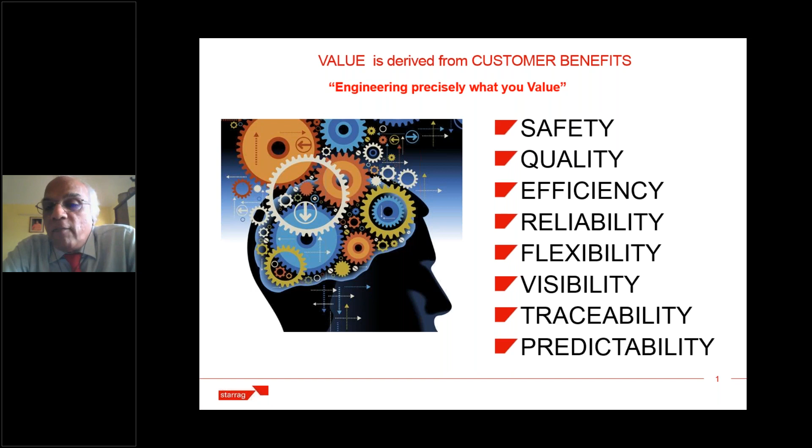Mini mass production, M-I-N-I, mini mass production. He is talking about customized production where variety is to be handled with velocity and volume. So flexibility becomes extremely important. And if those are the values of the customer, I would like to consider a machine tool design and the process of using the machine. Consider it as a 3-in-1 package.

I call it the overall equipment effectiveness, or the 3-in-1 package. Why do I call it a 3-in-1 package? Because the three are interrelated to each other. Many times we talk about productivity, quality, and availability, namely the uptime of the machine, as three independent parameters. Unfortunately, or fortunately, it is not so. They are three interrelated parameters. I'm sorry, there is some typing mistake there.

Machine availability stands for downtime measurement, reliability of the machine tool, and service response. Even if there's some reliability issue, how quickly we can fix the problem will improve the availability. Machine productivity depends on cycle time, performance — which means productivity — and performance also means including quality, but this is affected by parameters like torque, power, etc. Machine quality depends on accuracy, consistency, repeatability, process capability, and so on and so forth.

But when this overall equipment effectiveness leads to reliability, accuracy, and long-term precision, etc., you will see: if all of them are 90%, the product gives you only 73%. If all of them are 97%, the product gives you 91%. So our aim in manufacturing, design, and value engineering is to maximize the OEE. That's what I want to summarize: our entire discussion is woven around not just features, not just some fashionable parameters, but overall equipment effectiveness.

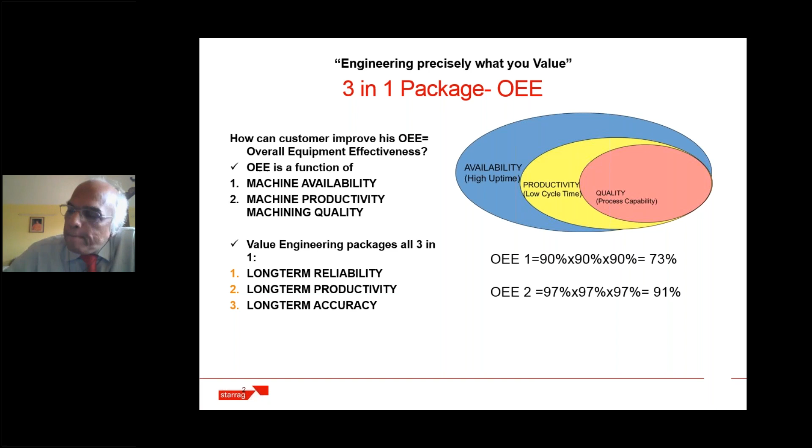I'll move a little faster now because of the time constraint given by VDMA. We have to move fast, though the same material could take 2 hours. Now, let's talk about high productivity and cycle time reduction.

The Japanese were focusing on high-speed machining centers because most components in the Japanese automobile industry are made of non-ferrous materials like aluminum. Whereas in the German concept, from the 1960s onwards, they were looking at high-performance machining centers, working with cast iron, steel, and tougher materials like super alloys.

That's the history of machine tool design. We have to look at cutting time reduction, non-cutting time reduction, pallet change time reduction, and so on. So when you talk about value engineering, the design concept has to find the optimum between high-speed machining centers and high-performance machining centers.

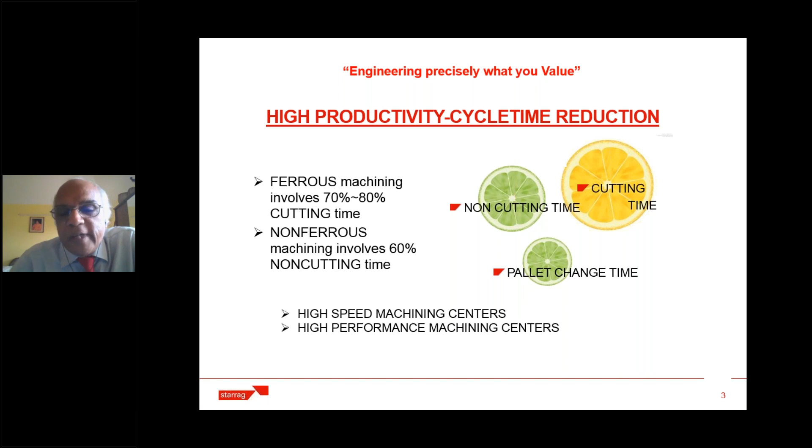Now moving on, we must be wondering what is the value engineering definition. By now you're familiar that we have to look at value not standalone, but along with cost. Some quiz questions alluded to the ratio between value and cost. For a small incremental extra cost, if you get a large increase in value of the product, the machine tool in this case, that is a very good achievement of value engineering.

Conversely, at the same cost I can increase the value, or do it at lower cost but give the defined benefits to the customer. Another way of looking at it is the optimization or trade-off between cost and function. Functionality relates to quality, productivity, or downtime of the machine, as we already talked about. And above all, frugal innovation.

Mr. Parasuram talked about the iPad concept - lower cost compared to a laptop, but more benefits to the customer since we can carry it wherever we want. Last but not least is modular value addition. Value engineering and value addition are two sides of the same coin, which I will explain through examples.

I will also talk about cost per part machined, total life cost concept, and total system concept. So there are three things: cost per part, total life cost, and system cost. Let's go through some examples to understand this better.

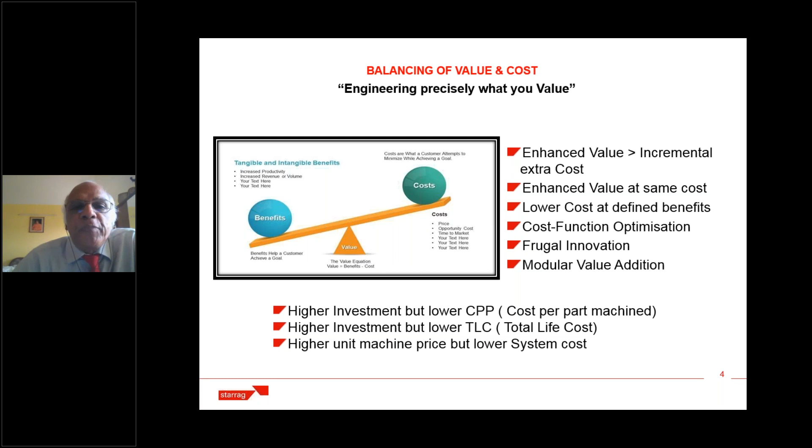We'll come to another very important point - the value chain. When we talk about a value chain, the final customer may be a tractor manufacturer, but he is manufacturing a gearbox. The gearbox goes into the tractor, but to manufacture the gearbox you need a machining center.

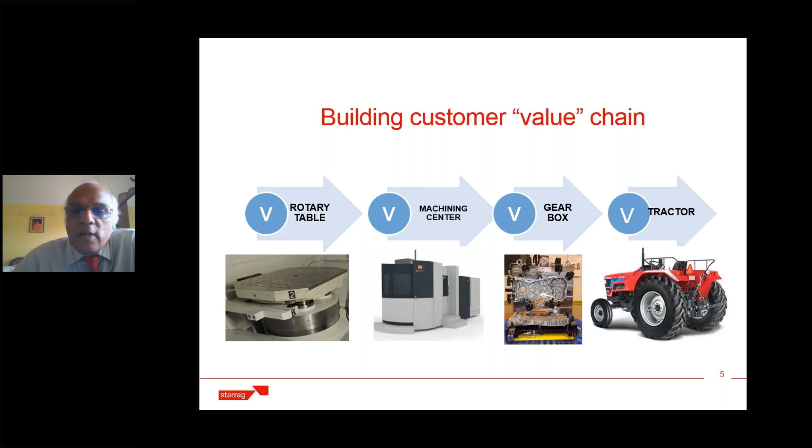Inside the machining center there is a subsystem called the rotary table, which is part of the machining center, leading to the machining of the gearbox with the help of fixtures and tools, and finally to the assembly of the tractor. In this value chain, what's very important is that at every stage, are we increasing the value at the same cost, or at marginally incremental cost, is the value to the customer increasing?

One example we did was with a very nice customer in Chennai with a very small compact machine. They were delighted because the same competition process was giving 2 machines. Even though the capacity was requiring only 1.6 machines, you cannot supply 1.6 machines, so all my competitors were offering 2 machines.

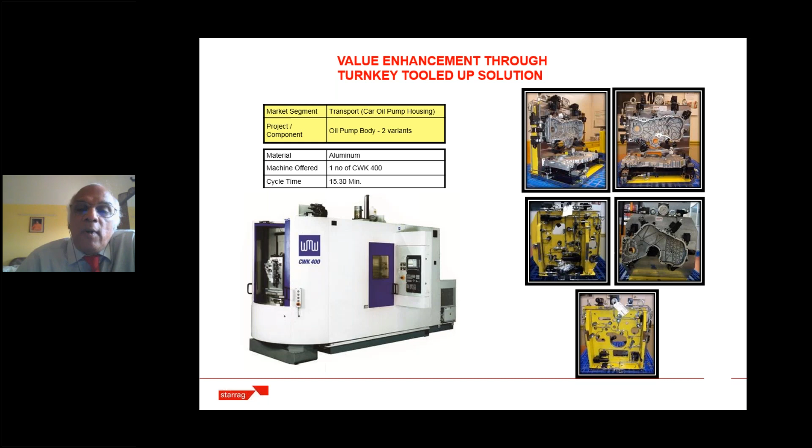Our people were so ingenious in the fixture design that all the setup changes could be managed with just 1 machine. You can see the fixture concept - the fixtures are placed on both sides, and the hydraulics are so well designed that the productivity and capacity could be achieved with just 1 machine. We call it the tooled-up solution, which most of you in the audience are familiar with.

The reason I'm giving this example, ladies and gentlemen, is that value is not just the machine tool, but together with clamping fixtures, cutting tools, and sometimes flexible automation or robotic automation, we try to satisfy and delight the customer. So there is value enhancement through a turnkey tooled-up solution.

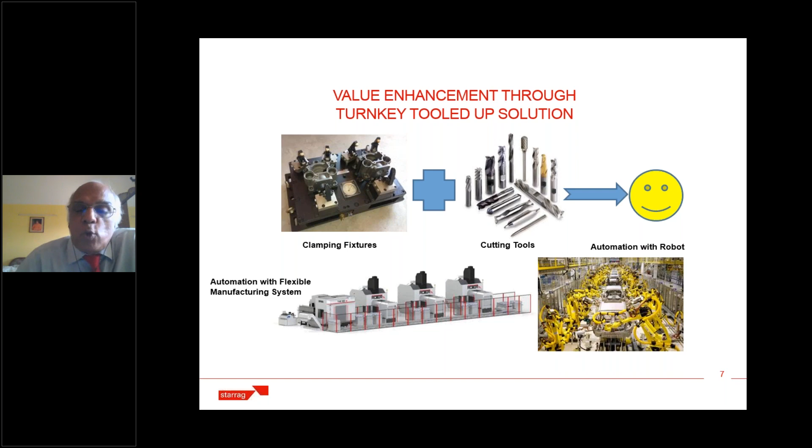There's a real-life case study I did in Chandigarh when I was managing director at Starrag, and I continue to be on the board. All competitors were giving 8 machines for the same capacity, and we achieved the same thing with 7 machines, proven with a turnkey tooled-up solution, which gives a very low cost per part.

The unit cost per machine may be high, but the cost per part, calculated as running cost divided by output per hour, and the running cost in this case is a summation of tool cost, fixture cost, consumable cost, maintenance cost, energy cost, downtime cost, and so on.

All this cost totaled up divided by output per hour makes it cost per part. Ladies and gentlemen, not only did the total number of machines come down, but the cost per part was the lowest in the industry, and without any discussion, the order was obtained and proven in practice over 3 to 5 years, still going on very strong.

Now, another example is the total life cost. Earlier we talked about total cost per part. Now, when you talk about investment, many people look at the value of the machine as very high to invest in the beginning. Even MSMEs say it's not affordable.

Here is an example where a machine tool industry purchased my machines, and because we could give proof, also proven in actual practice with references and actual case studies thereafter, that the total life cost over a period of 10 years, not the initial 1 or 2 years, including machine investment cost, turnkey cost, running cost, maintenance cost - underline, very important, maintenance cost - annual depreciation cost, when all these are added up and taken care of in the form of volume and variety, customized production, the total life cost was the lowest in this case. So every benefit can be measured in terms of cost.

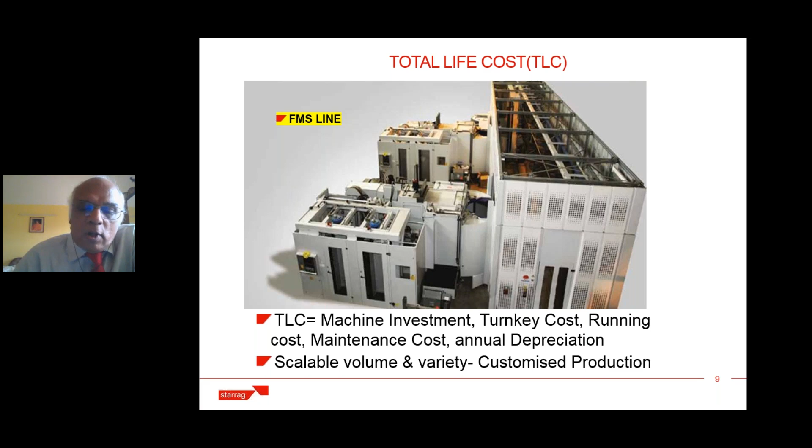Now, let me move on quickly to some examples of unit machine design. So far, whatever you saw was about how to give a tooled-up solution. Customer is never looking for a machine or a product. The customer is always looking for a solution, because he is in the business of manufacturing, let's say, a cylinder block or a cylinder head or a gearbox or whatever. It could be a valve industry, it could be aircraft parts, any part.

But he is looking for a solution to do with his component faster, better, and cheaper, with the best quality, delivery, and cost, and with flexible production of multiple varieties of parts. So he is not interested in the basic machine. He is looking at the solution.

However, I would like to now take you through, even in the basic machine, the way we can do value engineering and value addition. Now, when we do that, always start with the customer. My advice to all my friends here is, instead of looking at the product or the machine or the technology, even Industry 4.0, you should ignore it and look at whether it is useful for the customer.

Here is an example of small ferrous and non-ferrous parts for passenger cars, light commercial vehicles, tractors, trucks, and so on, multiple shapes and sizes. Metallurgy could range from non-ferrous to ferrous, sometimes super alloys. Accuracy levels could be anywhere from 1 micron to 7 micron positioning accuracy, with geometric accuracies varying widely. Volumes could be anywhere from 10,000 per annum to 1 million per annum. Variety of parts could be just a couple of types or as many as 150 types.

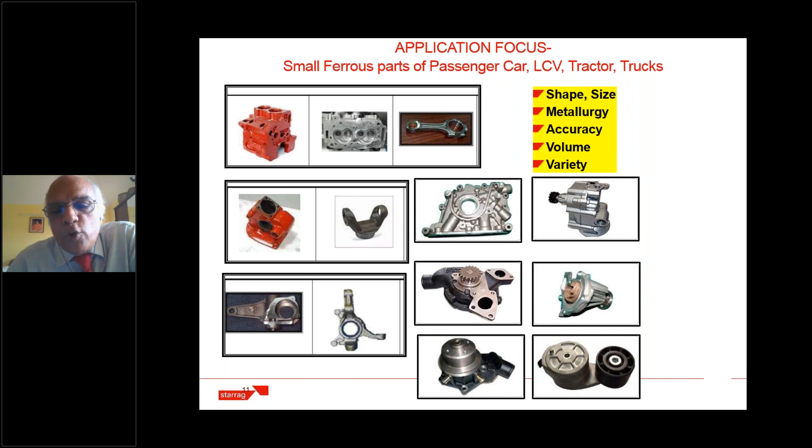Now moving on to examples of what I'm talking about. When we design the machine at the starting stage, we have to do external benchmarking, and also internal benchmarking. What is external benchmarking? When designing a machine, we look at the best in the world - Japanese, German, Korean and other manufacturers - and look at what are the best things they are doing in their own way, and what we can learn from that.

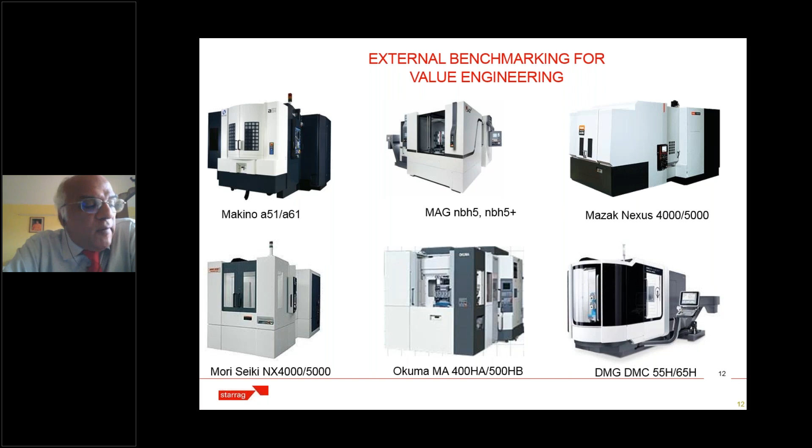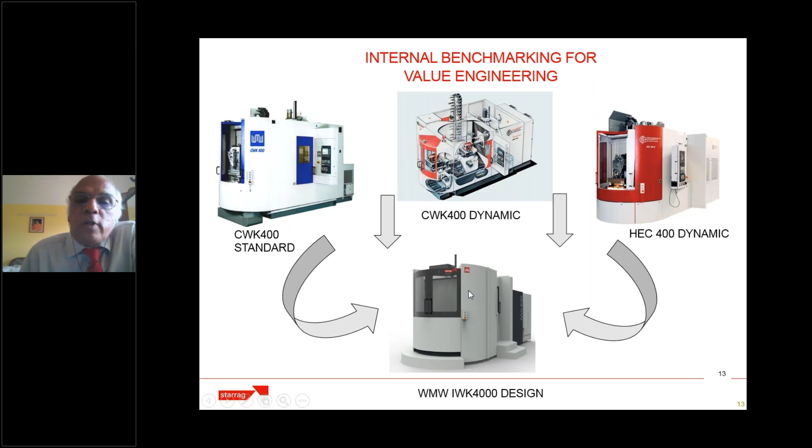Emulating the good ideas from anywhere in the world is very, very important without diluting the brand image. And we come to benchmarking our own product - we took the 30-year-old design product, a 20-year-old design product, a 10-year-old design product, and we came up with a design which is a composite value-engineered product. And what are the things we did?

One example is the conveyor evacuation system. The original designs had a very expensive central trough conveyor. Then we came to a dual screw conveyor, which is cheaper than this. And then we came to only bed flush for chip evacuation.

In this case, not only is the cost reduced, but the value is improved through reliability, because reliability depends on the number of moving parts. And as you can see, the number of moving parts comes down as we move from one design to another.

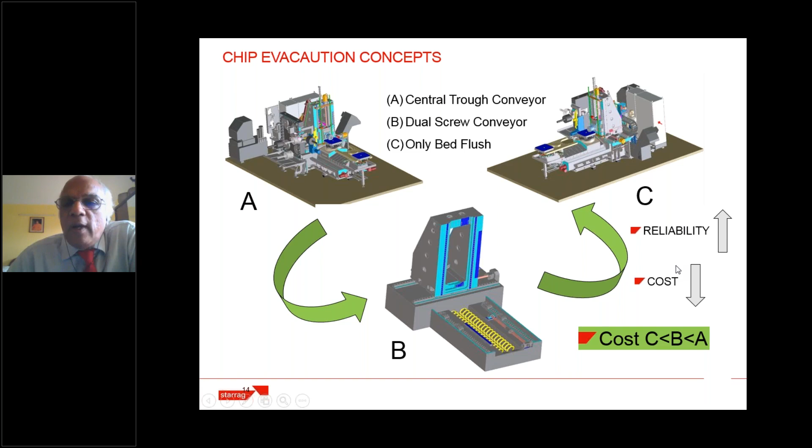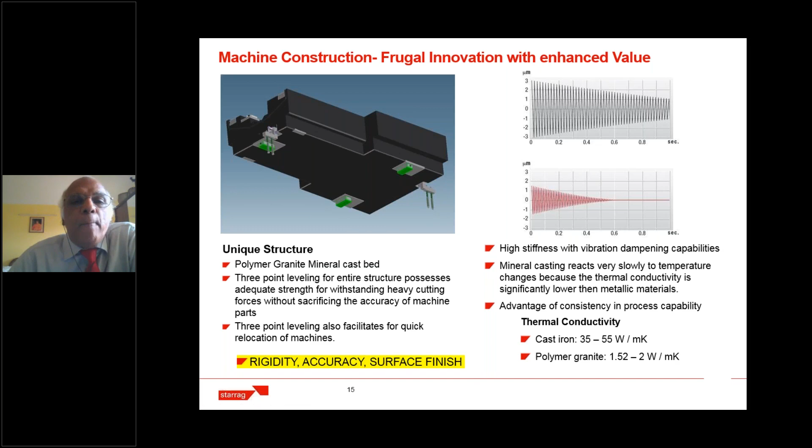I don't want to take many examples. This is an example of a polymer granite bed where rigidity, accuracy, and surface finish are all improved at the same time at a lower cost compared to a typical cast iron bed. Another example is a multi-purpose power pack for hydraulics, and another composite system for lubrication.

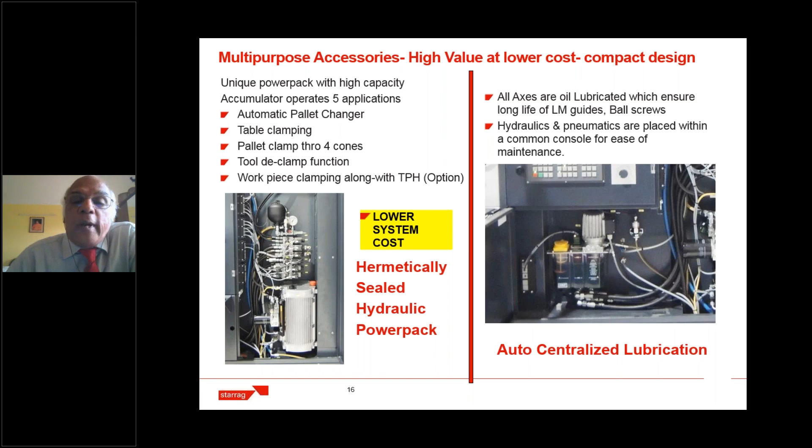In this case, the total system cost is very, very important, and a hermetically sealed hydraulic power pack is of course more expensive than other simple power packs, but the total footprint of the machine became so compact that the overall cost of the equipment became much less than the competitor's machine.

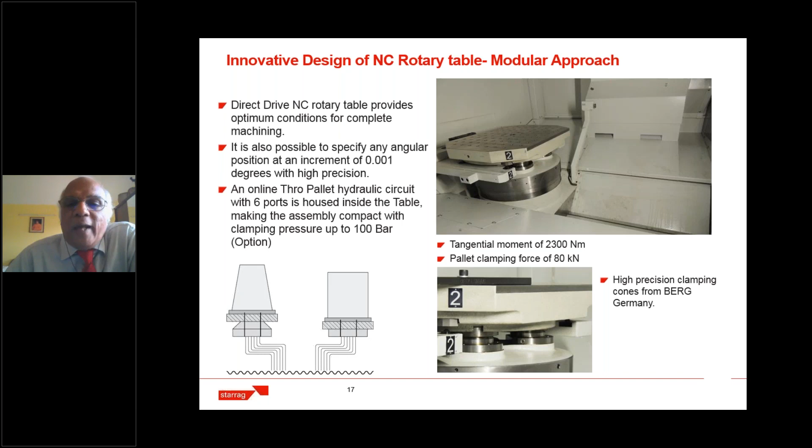Another such example is what accuracy can be achieved through a small Kaizen, or innovation, using a central bore and an orientation bore. Any number of times you take out the fixture and put it back, the repeatability is achieved.

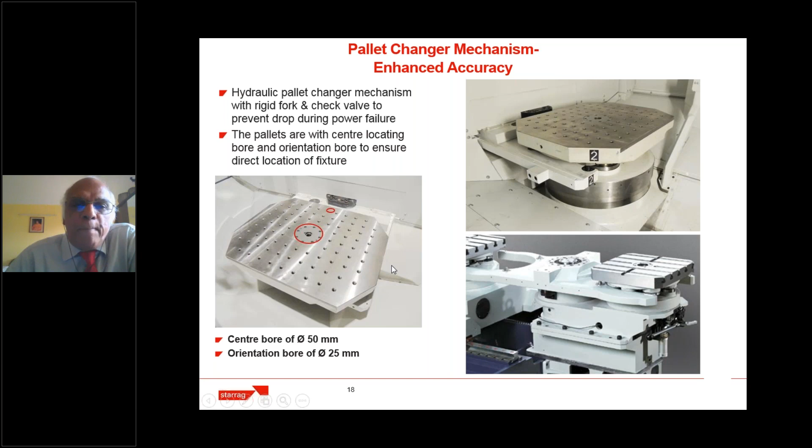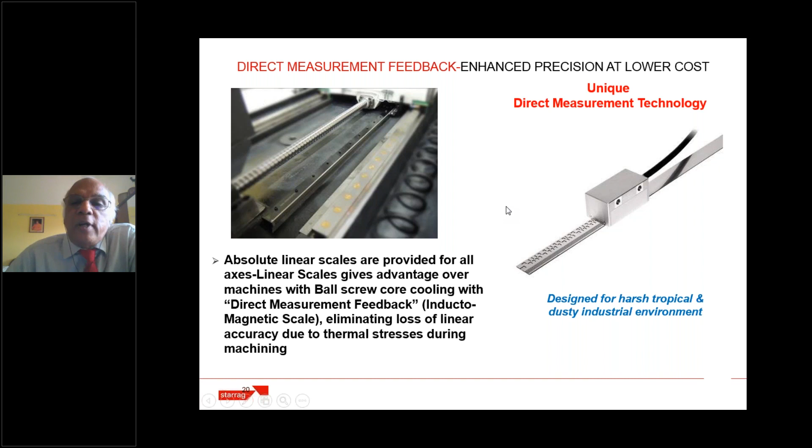Another example is cylindrical roller ball bearings on the linear guide, improving durability and accuracy. And yet another example is using a magnetic scale, or inducto-magnetic scale, to eliminate positioning errors. It's a direct measurement technology to improve the positioning accuracy of the machine, and the precision was improved at a lower cost.

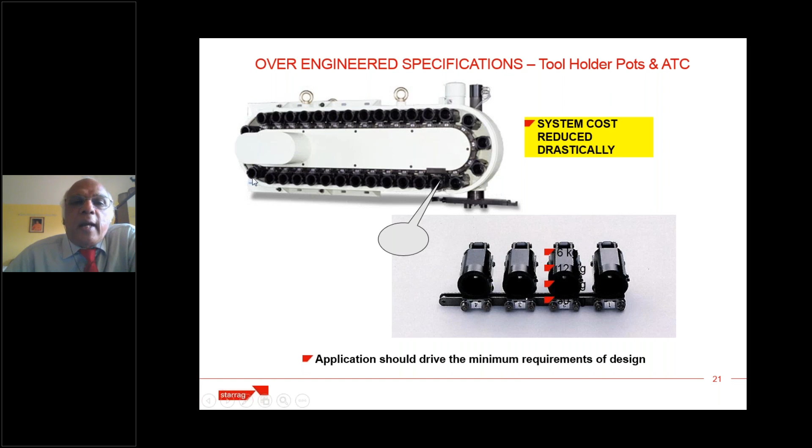An extremely important example is when the tool pots are made optimum, finally we can make the entire tool design at a system cost reduced drastically.

Another example: the chain magazine is not flexible, whereas we went to a tower magazine. As the customer's volume and variety increased, we can keep adding more and more towers to take care of the cutting tools loaded onto this magazine, scalable with business growth in volume and variety.

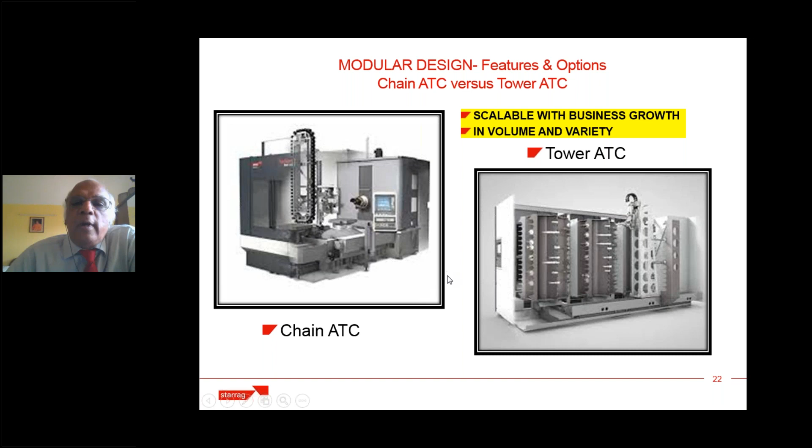I am forced to go faster, but we are almost there. I think we may not have time for the video, but suffice to say, value engineered products assume a lot of significance due to increasing customer demands during this corona period, continuing input material cost increases, the face of product price competitiveness, Muda elimination, and the COVID era has really opened eyes. The competitive world demands faster, better, and cheaper to survive and grow as an organization.

In order to facilitate the achievement of the required quality and cost objectives for the manufacture of a product design solution, it is extremely important to value engineer at the earliest possible stage of design. Failure to get this right in the beginning often results in late engineering changes with their associated problems of high cost and lead time, and having to live with components that are of poor quality or expensive to make at a later stage.

Hence, value engineering, ladies and gentlemen, is an exercise to balance cost on the one hand to the value the customer derives from the product. The customer is the focus in doing value engineering, not just the cost. Value analysis and value engineering are therefore the foundation of success. I wish all of you the very best.

We may not have time for the 2.5 minute video, but if Mr. Rajesh Nath would like to show the video for the audience, he can play it and I'll give a small commentary on it.

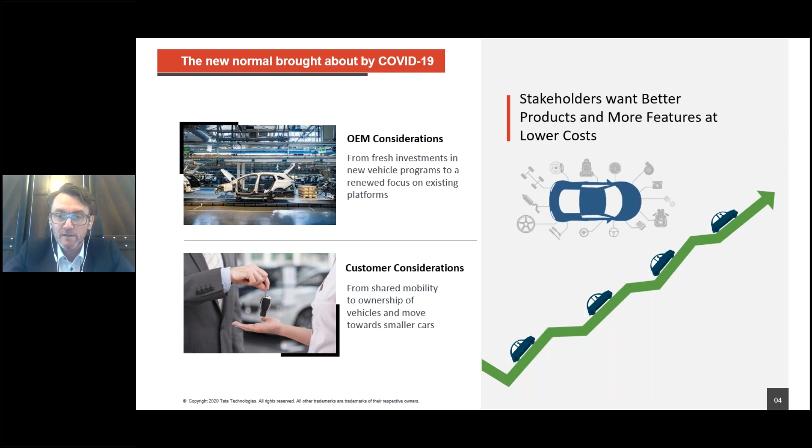When we look at the value chain, it has been impacted in many areas by the new normal. One is supply chain continuity. When the crisis arrived, when transportation stopped and people couldn't move, there were big challenges about logistics. There's a real question about what the logistics and the network of suppliers and customers should be in the new normal.

That could mean a more regional supply chain, or a combination of low-cost areas for suppliers along with some closer suppliers to limit the risk.

There is also a procurement challenge to be addressed, because like in any crisis, unfortunately some companies will not survive from that crisis. There is a need of looking at the robustness of suppliers, how they are able to adapt very quickly to the new normal, and being able to continue to supply parts. There will be a need of recalibrating engineering.

So there is an extensive reverse engineering which has been started, and this is linked to how to do more, better, for low cost, which will require some very quick engineering activities. There is also a need of optimization of production with more flexibility, reorganizing of the plant, mainly due to the need of social distancing, which is required now to protect people against COVID-19.

Okay, so now we will go into more detail. Thank you very much for sharing the movie about the organization and what we're doing for value engineering and manufacturing efficiency.

On value engineering, there is a real link, and that's the way we have built up our approach. When we do our value engineering, which goes through the focus on cost reduction, retrofit on existing platforms, new features, new variant strategies, and increase of automation, all of that is done with a real link and analysis on product and process at the same time. We believe this is important because the real savings and improvements come from both the value engineering and manufacturing side.

So we have built up an approach which takes care of both of them, and also of the new requirements from the customer, the sourcing models I mentioned previously about continuing to source from India, Asia and China, but also other countries, business model disruption, completely rethinking how we can do manufacturing and engineering of parts, and optimization of workflow and production schedule. All of that is done through the analysis we perform with those two approaches on engineering and manufacturing.

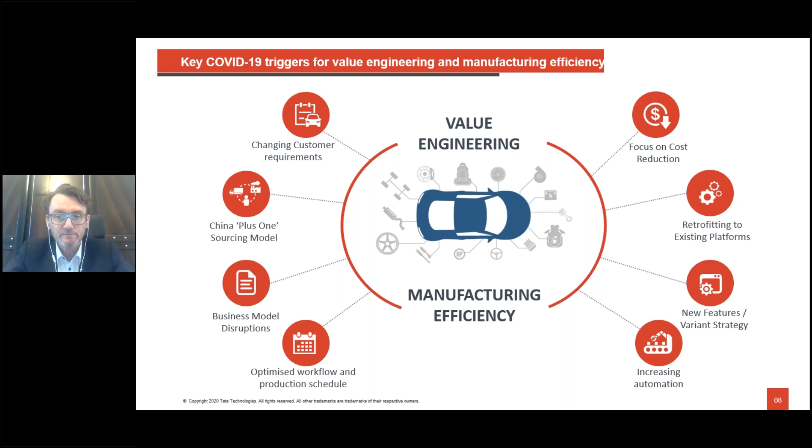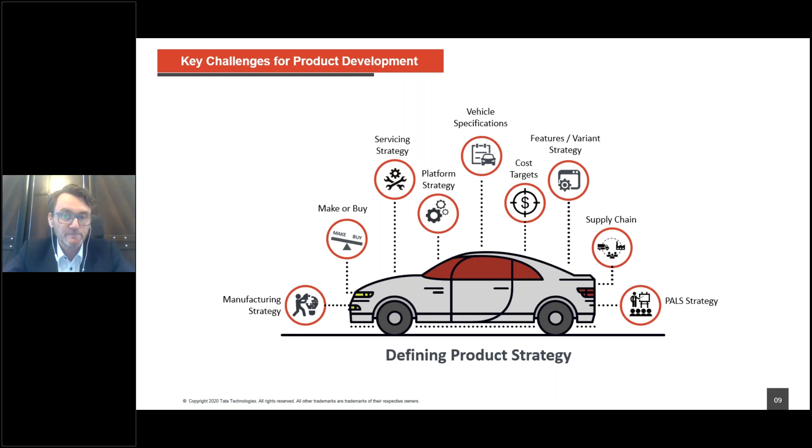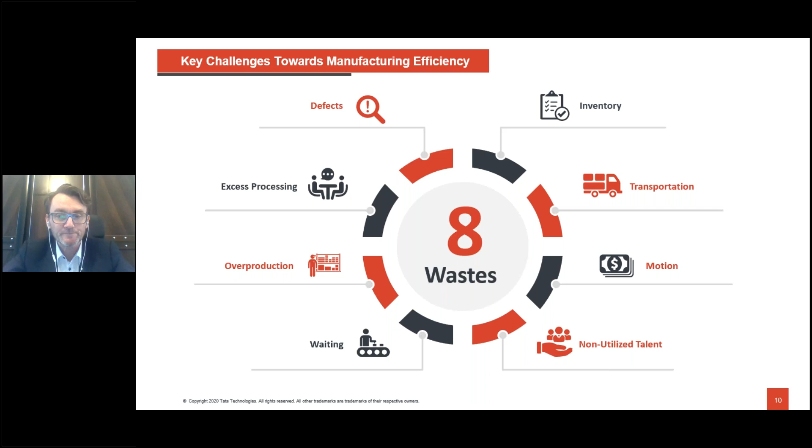On value engineering, what we're really doing - and value engineering is not a one-time process, it should be seen as continuous improvement. As we can always improve on the manufacturing side with waste reduction, on value engineering there are always possibilities to improve. This goes through purely value engineering activities, engineering design optimization, product weight and cost optimization. Then there is an activity of tear down and benchmarking to understand the best-in-class solutions available on the market and what the competition is doing. Then we have a cost engineering activity, after the tear down and benchmarking, evaluating the cost of the product, which includes product cost and also some estimation of manufacturing cost.

Then some studies about sourcing, what is the best way of sourcing those parts, with regard to local sourcing, regional sourcing, or global sourcing.

And then there are also some activities of reverse engineering, so to rebuild from the parts which already exist, and then redesign those parts to be able to recreate them. This is a continuous process that we can do again and again, as the improvement never stops, and there are always ways of doing better.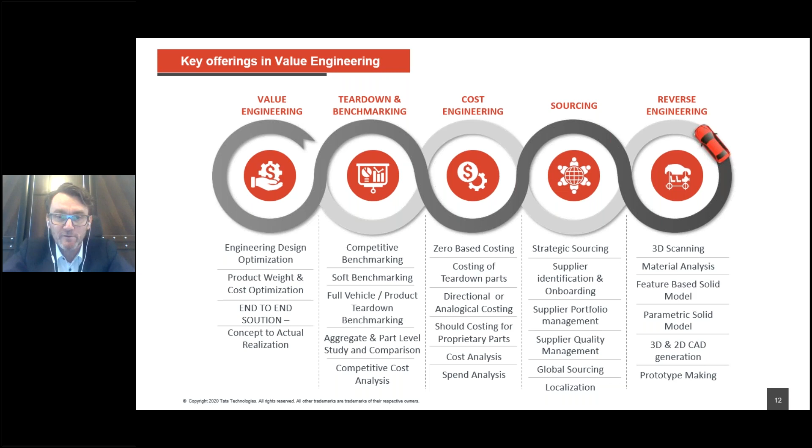And what we are doing for waste elimination, which was very important during the pandemic, is we have developed what we call the digital twin, which is a digital model, a 100% copy of the physical plant.

What is very important when we have that is to be able to work from the digital model to simulate everything, first to identify all the different waste, to make specific analysis on this, and then to make modifications on the digital plant to try changes and see if we're not creating, for example, bottlenecks in some areas which would create other waste, trying to eliminate one waste and creating more waste somewhere else.

So we have those models running, which we do with our customers, and that gives us the possibility to really simulate and anticipate all the improvements we can make, and afterward implement them in the physical plant. That was very important during the pandemic, mainly in India.

There was some real limitation on the possibility for people to move from one area to another, and there were also some constraints with curfews in some areas.

So with the customers who had those digital plants, we were able to really anticipate what the new normal would be, how we could reorganize the line, for example, to add more automation and avoid people being close together, to respect social distancing in a plant, which was one of the constraints coming from COVID-19, and how to create more flexibility with demand, which would fluctuate with a drop in production.

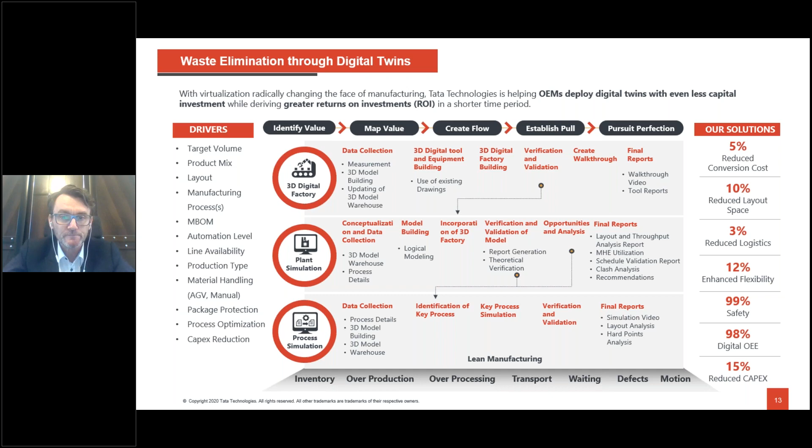What is important is that because it's a process, it could apply to any industry. So we have experience in automotive and industrial heavy machinery, but when we look at the process and how to do it, it could be applied to any type of industry, whether with value engineering activities, benchmarking, costing, and so on, or with digital plants and activities for improvement of manufacturing and reduction of waste.

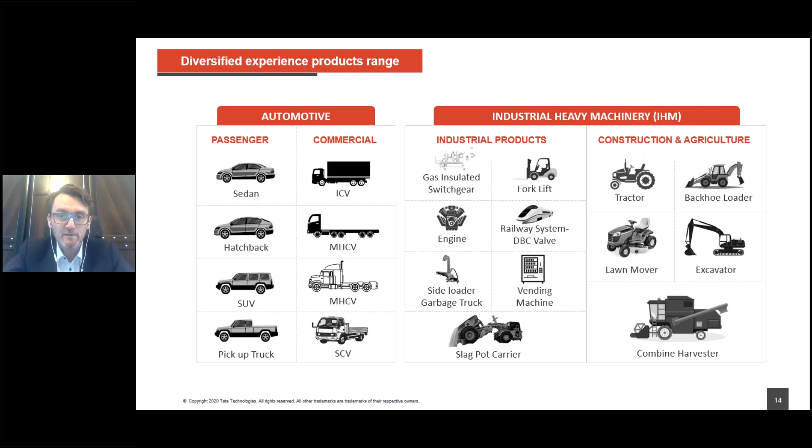So, a few case studies. I will be very quick on these to keep some time for questions.

We have studies we've done for leading European OEMs who wanted to enter the Indian market. We made a deep dive analysis of some competitor vehicles, proposed through a cross-functional team some different studies, and presented possibilities for vehicles that would fit best in the Indian market, along with the best solutions that could be competitive based on what we analyzed and what we understand from the market.

The result is that through that study we were able to propose 5% weight saving and 6% cost saving compared to their understanding before coming into this study of the Indian market. So we helped them improve their entry to the market.

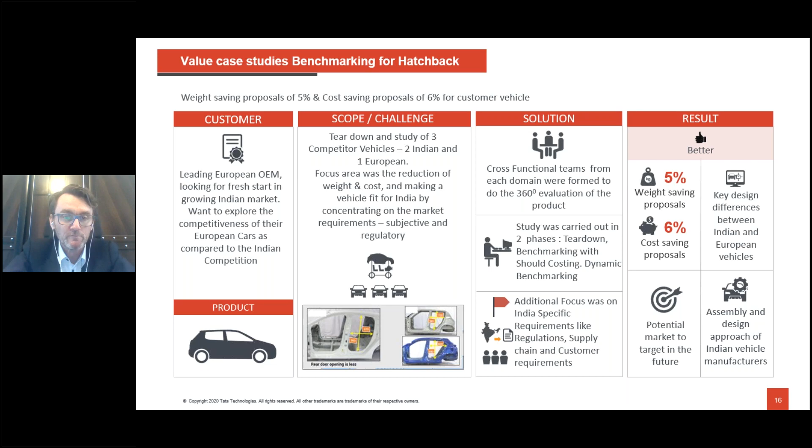Another example we had was different: a startup automotive company in the Asian region, in a country with very limited automotive production. We helped them analyze the products they could make, and the possibility to localize some components or use suppliers in the region.

By doing all those studies with them, those analyses, and proposals on where to put the value for the car, understanding the vehicles they wanted to put out, we were able to propose solutions with potential cost savings from 7 to 9% on sedan and SUV.

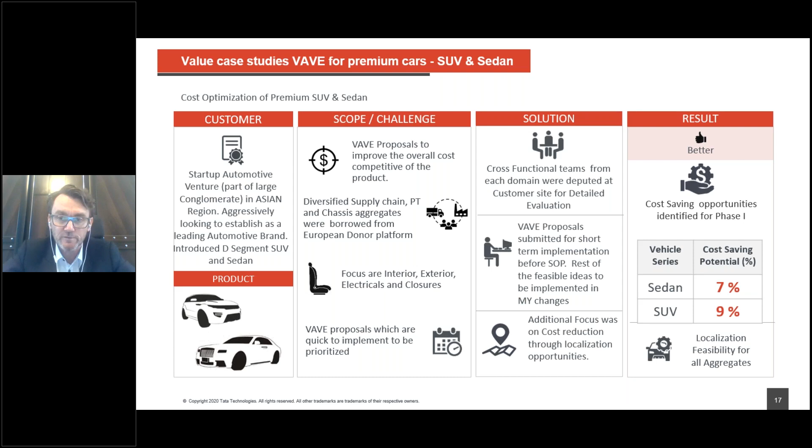Yeah, Frank, we have one more minute. Yeah, good, I just have two slides, so it will be done in one minute.

This one was for an IHM customer that we worked with for an excavator, where we helped them identify and work with some local suppliers. Globally, the supplier was in the USA, and with the work we did, we achieved up to 23% cost saving on the product.

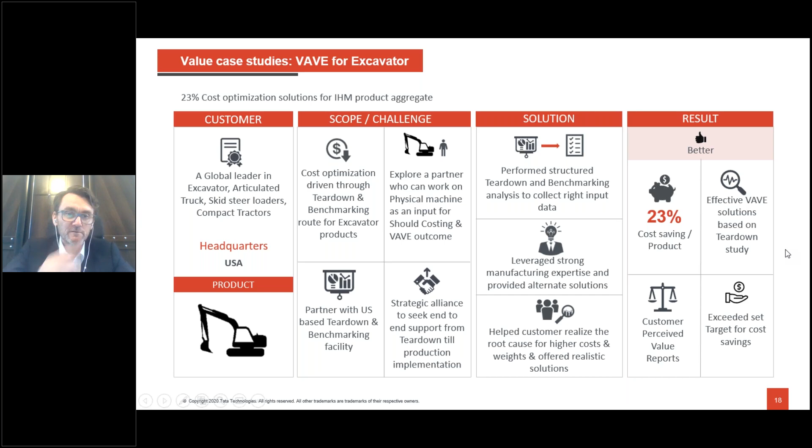Next slide. This one was about the digital twin and virtual commissioning that we have done, and predictive maintenance, which we did with a steel producer, one of the largest world steel producers.

On this one, we did exactly what I explained about the digital twin, the analysis from that digital twin, and found possibilities of making significant cost savings up to 30% for the commissioning of activities. There is also continuous activity with them to find even more savings from that digital twin approach, optimizing from the digital side and then applying it on the physical plant.

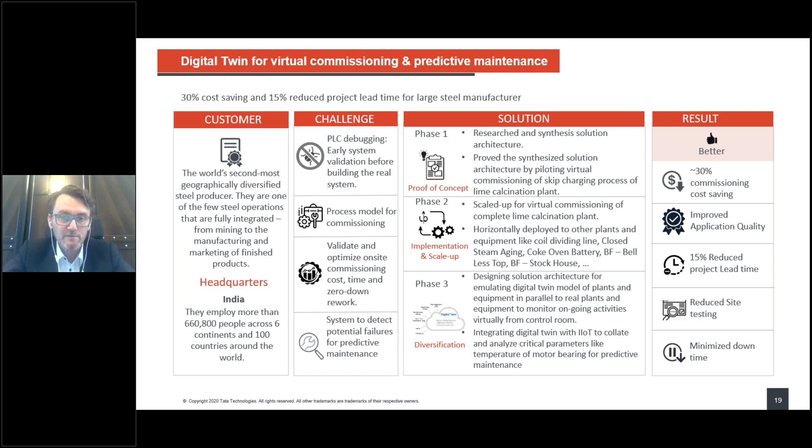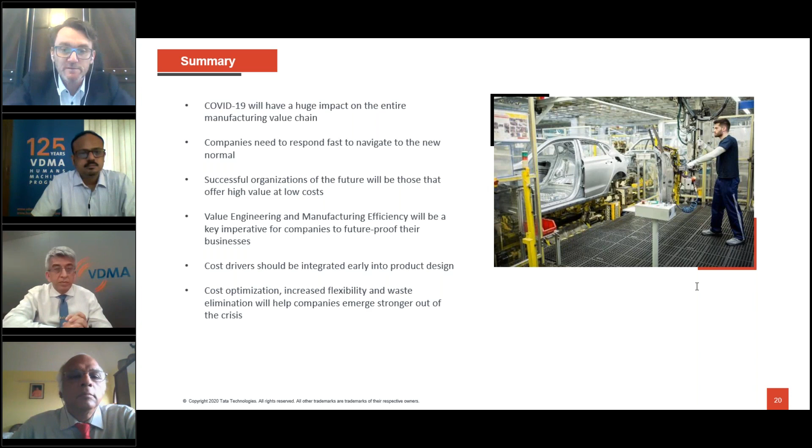Next slide, please. So as a summary, COVID-19 has had a huge impact on the entire manufacturing value chain. Companies need to respond fast and navigate through the new normal, which is unknown to everybody. A successful organization in the future will be one that offers high value at low cost, so there is really that pressure. Value engineering and manufacturing efficiency will be a key imperative for companies to future-proof their business. Cost drivers should be integrated early into the product design. Finally, cost optimization, increased flexibility, and waste elimination will help companies emerge stronger out of the crisis.